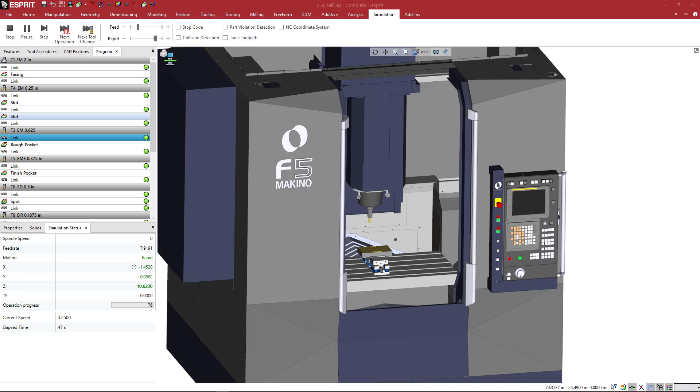As a machinist, you don't want to be milling into your expensive fixturing or accidentally rub your tool holder surfaces up against your work holding. So by spending a little time up front building your work holding products into the Esprit simulation, you will have a ton more confidence in your program sent to the floor.

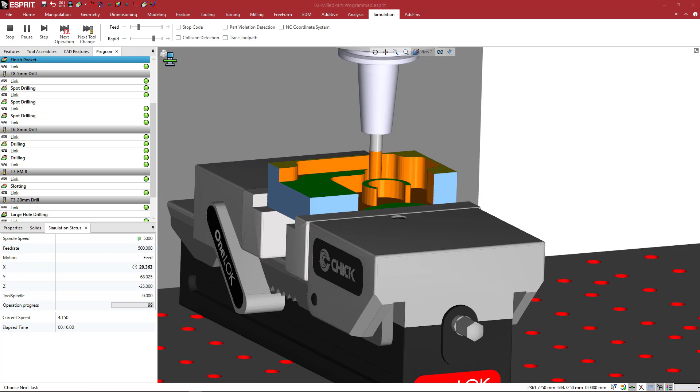So let's build this single jaw Chick vise. This is the CAD model for one of the Chick vises that you can download directly from their website. This particular model, if you wanted to follow along, is their OneLOK vise. It's the 1540 series, and there's two of them - a CM and an MCM. So this one is the MCM model.

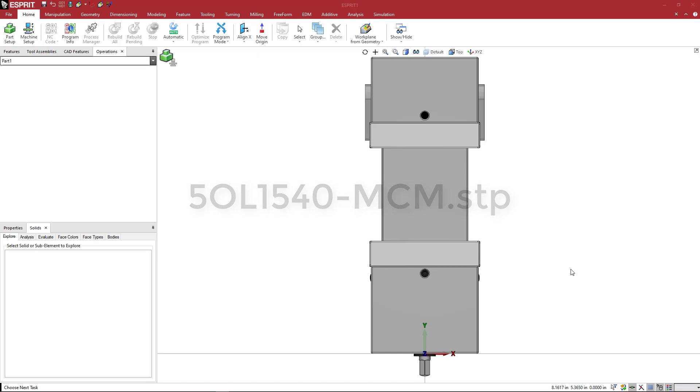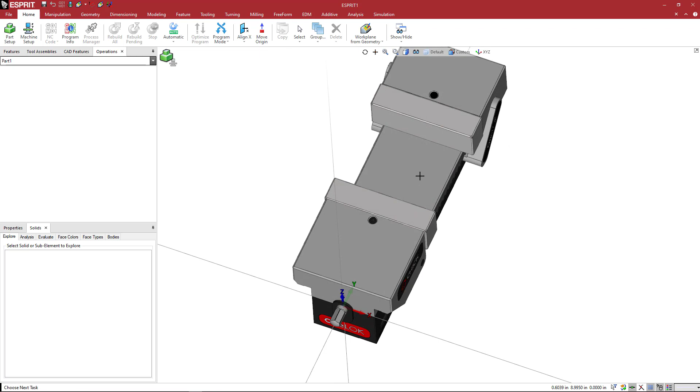I'm not really sure what the difference is between the two, but when we look at the model, the first thing that we want to do is make sure that the model is oriented and positioned correctly in space. So when we look at it, the movable, or the jaw axis, the vise axis, whatever you want to call that, is along Y.

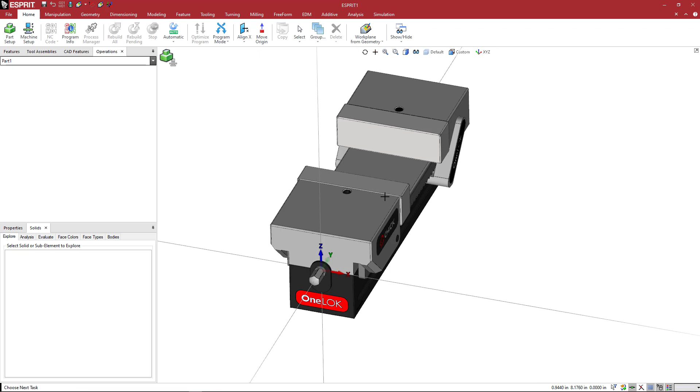And I think that that's what we want, because typically most people that I see would initially mount their vise in this orientation, with the Y-axis. Let's say you're standing in front of a Haas machine - your vise is going to go in and out of the machine, this axis. So I think that that's fine.

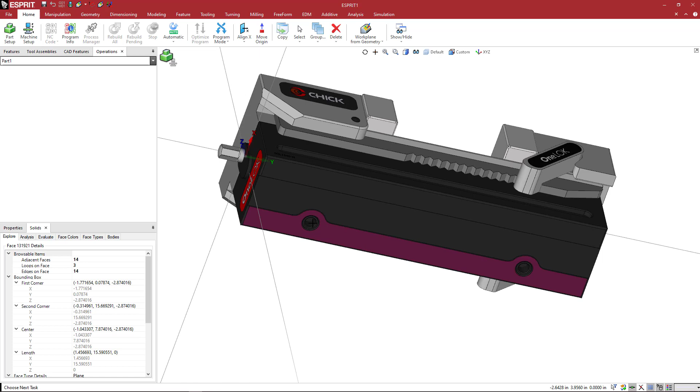If we look at the orientation, it is normal to Z, which is correct, but the location needs to be adjusted. On these particular products, I'll highlight this face here. What we're going to do is set the 0 point at one of these locations - a ground location.

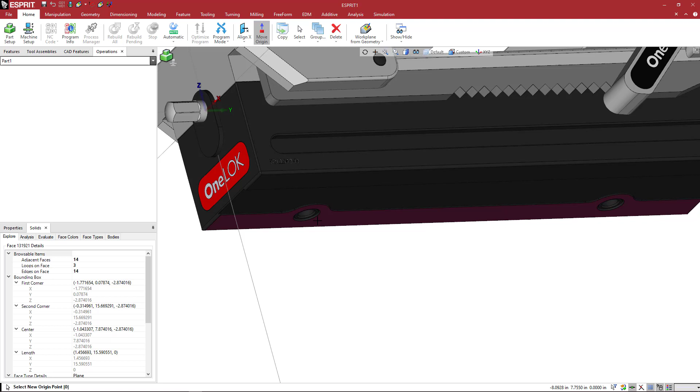So if you have a Chick foundation that has the press fit bushings for location finding and repeatability, we're just basically going to come here and say move origin point to this location. So under the Home tab, we're going to come to Move Origin, and we just want to make sure that you can see there's definitely different little circles that I can highlight and pick. I want to make sure that I'm on this one - it's highlighting in green that outside face.

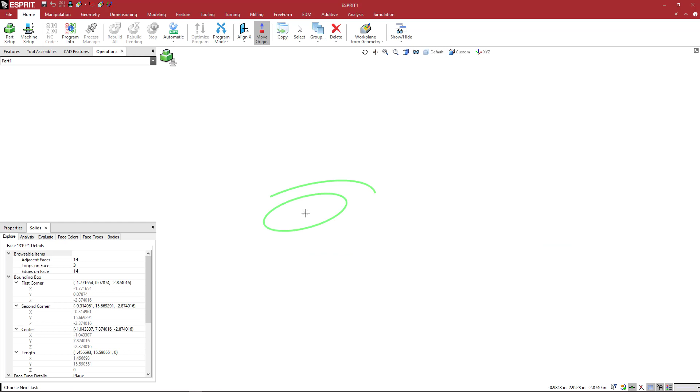I don't want to pick one of these inner bores or inner circular faces. I just want to pick this one on the outside, because that is the face that is going to sit flush. Let me go to a clear view here - these are the faces that are going to sit flush on the top of the table, or the CHICK foundation that you can interface this product with.

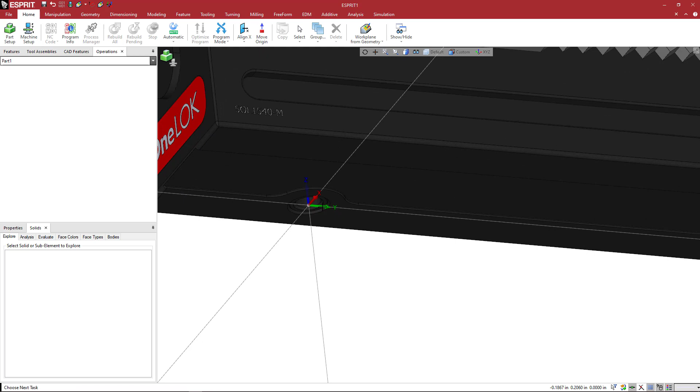So I'm going to go ahead and use that. Now, if you don't have a foundation, you don't plan to use a foundation, you got some custom thing, you can use a different location - you could set this to whatever you want. So basically, when we load this fixture into the Esprit simulation, this is going to be the reference location point.

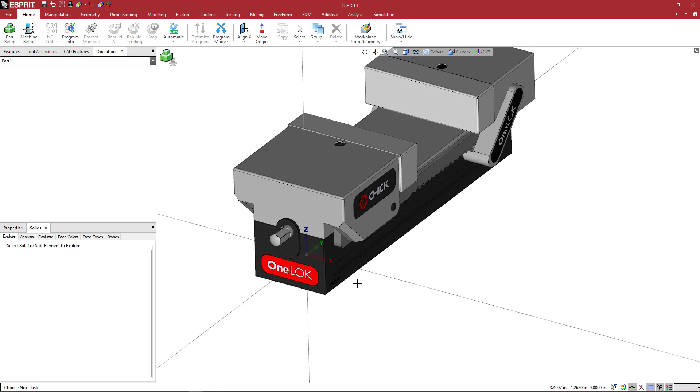That Esprit is going to use. So if you loaded it right on your machine table without the foundation, what would happen is this point would be at basically the center of the machine table itself. So, okay, the orientation, the location, the rotation along Y here looks good.

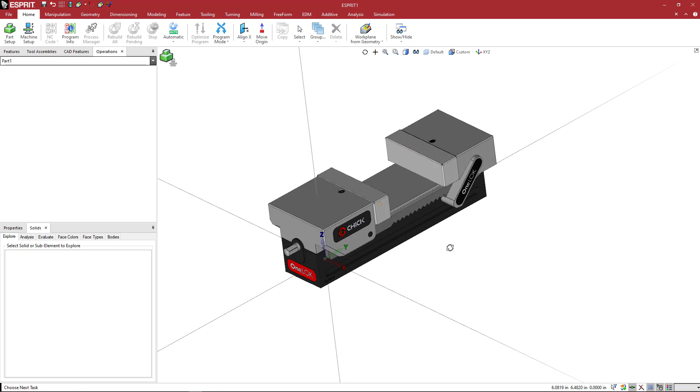So we're going to go ahead and start setting some of our 0 positions. So when you're making a vise like this in the Esprit interface, there's another product called Machine Tool Builder that gives you more flexibility. But inside the Esprit interface for basic fixturing like this with a single jaw, you really want to start with the jaw in the open position.

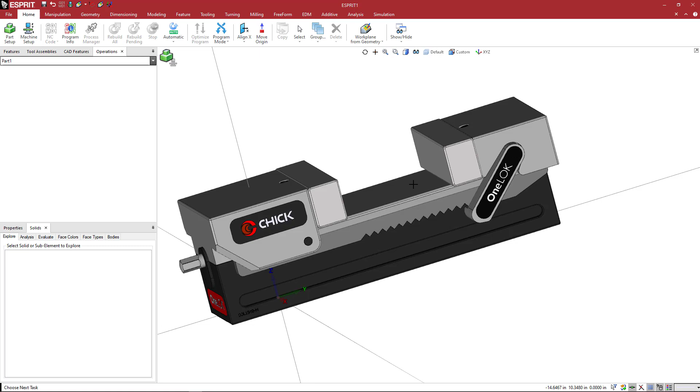Because when you save everything out, Esprit thinks everything is in the open position, and it's going to move to close it. So we want this in the open, or the maximum position. On this product, it's like 128 millimeters.

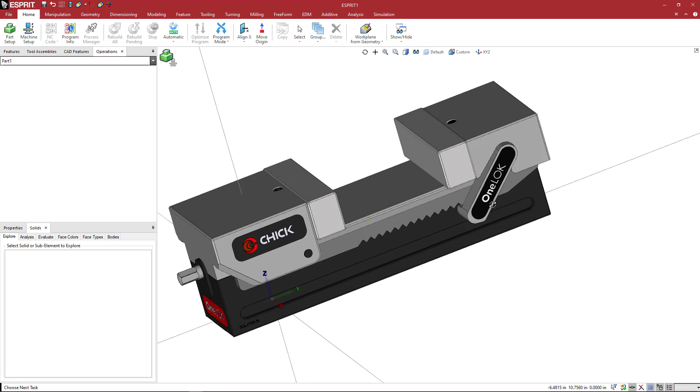You can see these serrations where the OneLOK lever is located. And to me, this looks like it's at the maximum open position, so I'm going to assume that's what it is. So we're going to go ahead and leave everything alone.

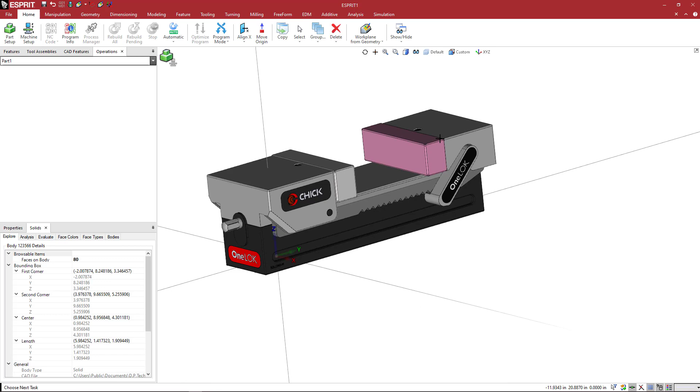If you wanted to kind of give yourself a little bit of leeway, what we can do is - let's see here - this is a separate solid. This here is a separate solid. Let me put this on a separate layer here. We're going to call this movable.

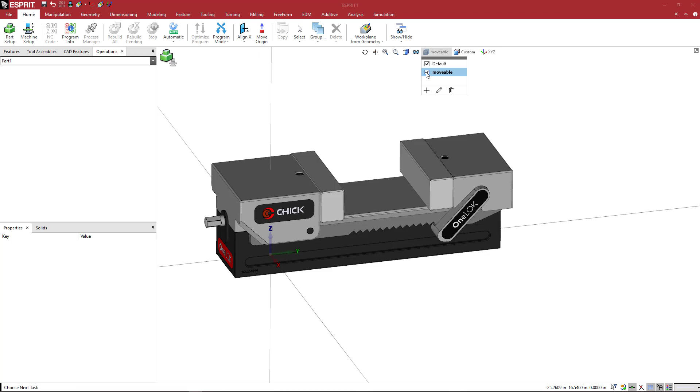And I'm going to come over here to the properties, come to general, and here's where you can change your layer. I'm going to say from default, let's put that on moveable. And if I turn this layer off temporarily, I can see that it's basically everything that would go along for the ride. So if you want to move these two solids just a little bit more, just so you know,

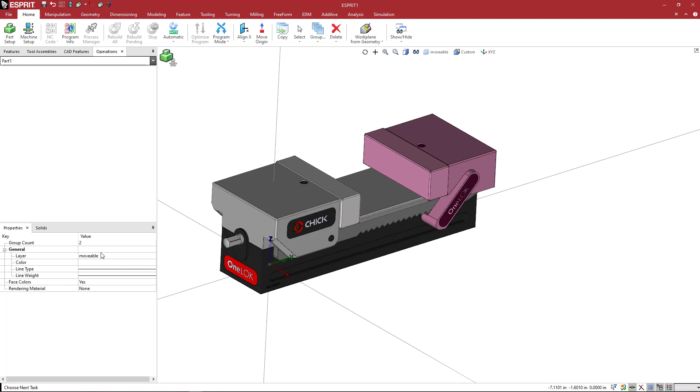in the simulation, if you got a big part in there, you're doing something, because it's simulation. As long as this is able to clamp, you can go ahead here and say copy, and then you can do a translate command, and you can say move, and we're going along the y-axis here, so we want to go in a positive direction. So I'm just going to say, hey, let me give myself an extra quarter or a half an inch or something. So I'm just going to say 0.5.

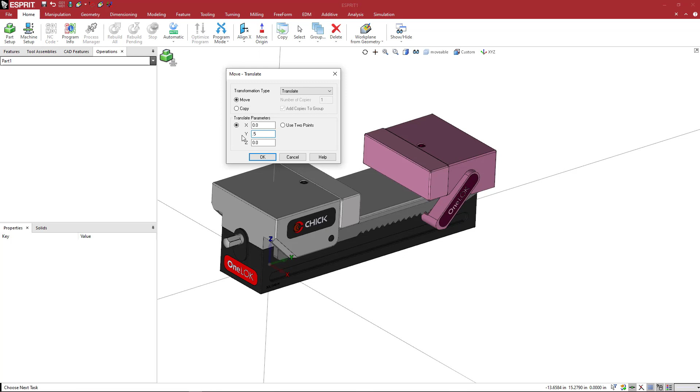And do you need to do this? No, it's not that big of a deal. But we can see here now that we are beyond the serration. So it's just a little bit of a fudge factor for myself. You don't need to do this. So we've moved this to a different layer.

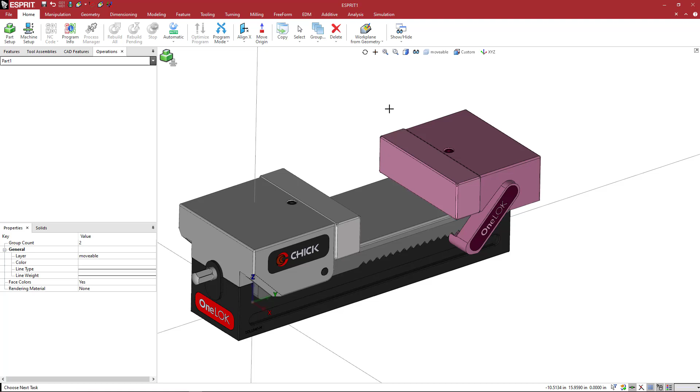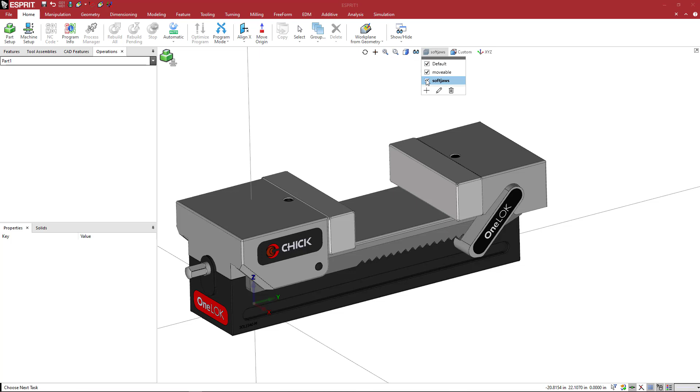Now what I want to do is I'm going to take each of these, basically these soft jaws, and I'm going to put them on their own layer. So I'm going to come here to the layers and create another layer, and I'll call this soft jaws, and we'll put them on that layer temporarily as well. So what I'm going to do is turn those off, and I'm going to come back here and activate the default layer.

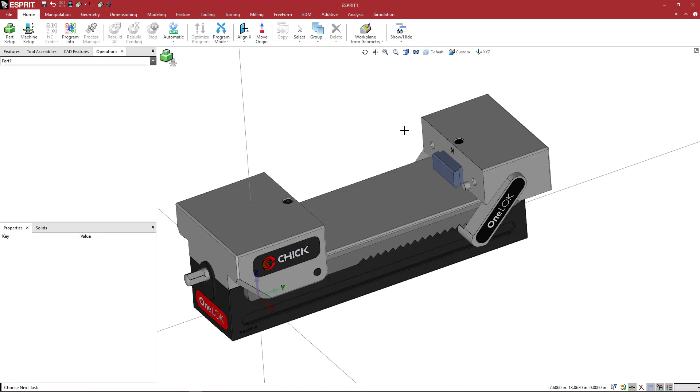So now I have basically like the fixturing cavity or zone of this vise without the jaws in there, because I might want to define different jaws for different applications. Maybe I have a round part or something with a different shape on it, and I might want to create that depending on how accurate I want my simulation to be.

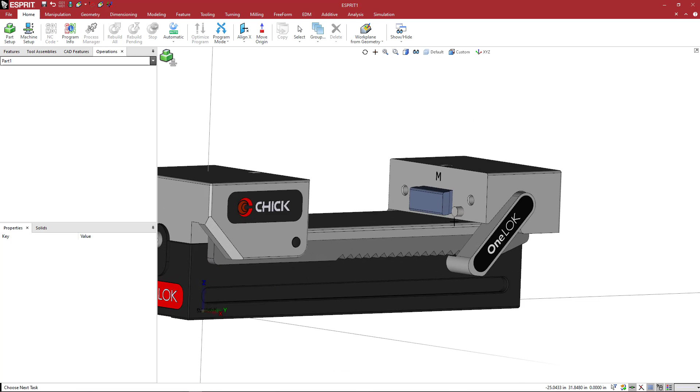So looking at this, we want to define our jaw axis. So this stuff here is going to move. It's going to slide up and down the y-axis, and we need to have a reference position for that. So what I'm going to do here is, I think I'm just going to come to this bottom position, and okay, so in Esprit, the default movable axis is always going to be along X.

So we see here that our UVW is right now moving it along Y. So anything that is going to be on the jaw axis, I want to make sure that it's moving along X. So we don't need to position our entire vise. We just need to position the jaw axis that we're defining. So what we're going to do here is, around the Z axis, we're going to rotate our UVW by 90 degrees. So here we're going to come and say rotate UVW, okay?

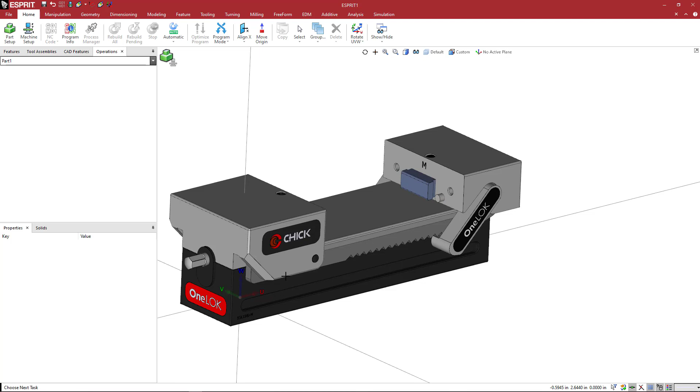And down here at the bottom left, it says what's the rotation about U, and then V, and then W. So we're going to put in 0, enter, 0, enter, and then positive 90. And that's going to get our U axis orientation, so that the jaw will move along U. And now I want to position that. So I'm going to position it where my jaw axis is going to be.

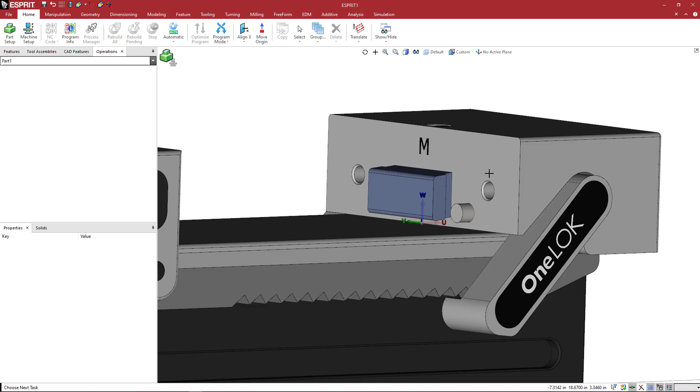So I'm going to come here and just say, let's translate. So activate translate, then click on the icon, and we're going to translate our UVW, and you'll see that there's a center point on this bottom edge of the solid, and if I click there, it's going to relocate my UVW at this position.

And here I'm going to come and say, let's make a jaw adapter _1. There's only one movable jaw. I don't need to worry about naming this or anything. So we're just going to go ahead and create that. So we have that now.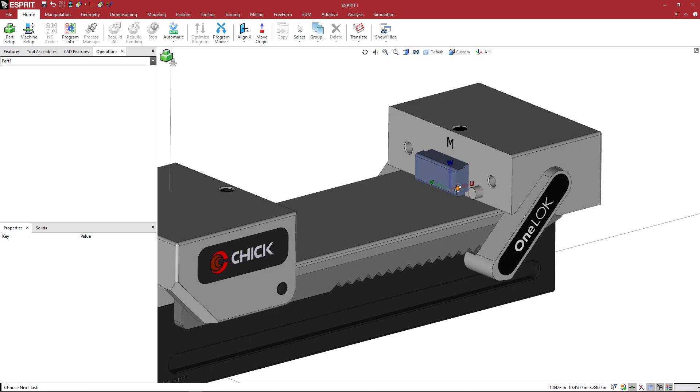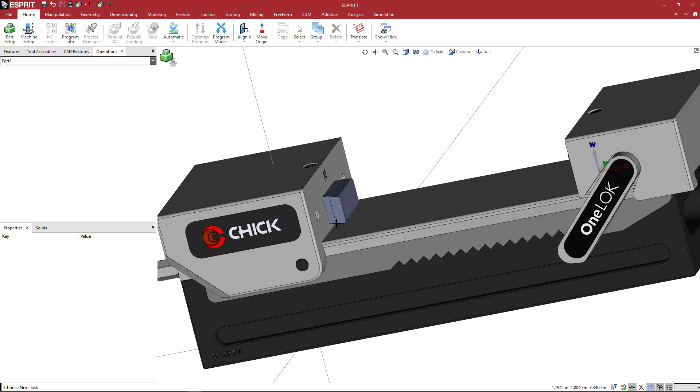Now what I want to do is put a location reference on this side. So I'm going to basically create a location where I can now mount a fixed jaw. So we can have a different jaw. And to explain this, on this movable, all of this with the jaw is going to be a single element. And this will make a little bit more sense later.

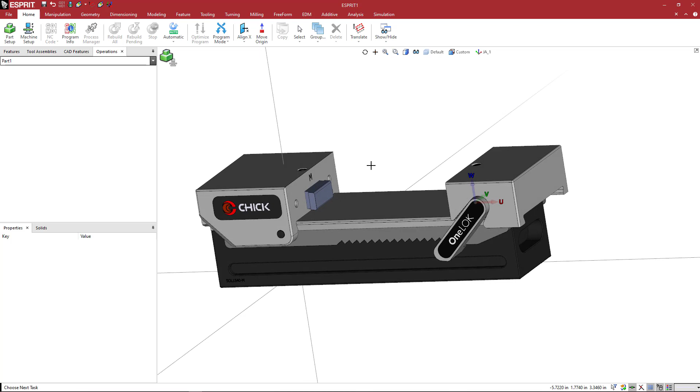But we're going to make one element that's going to include this whole moving assembly, which is going to be whatever soft jaw that I have here, or serrated or stepped or whatever jaw, with this lever component here. That's all going to be one. And then this body is going to be another one. And then this jaw here is going to be a third component. And they're all going to be assembled inside of the simulation.

So I need to make a location here for this jaw. And what I can do is I could leave this orientation alone the way that it is.

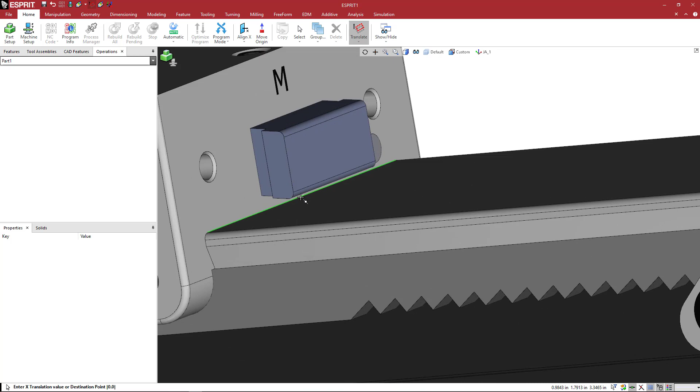I'll just come over here to translate and pick right here. And now I have this location for what we'll call a fixture adapter. So we had a jaw adapter for the moving portion, but this one is going to be a fixed jaw, and it's going to be a fixture adapter, FA_1, okay?

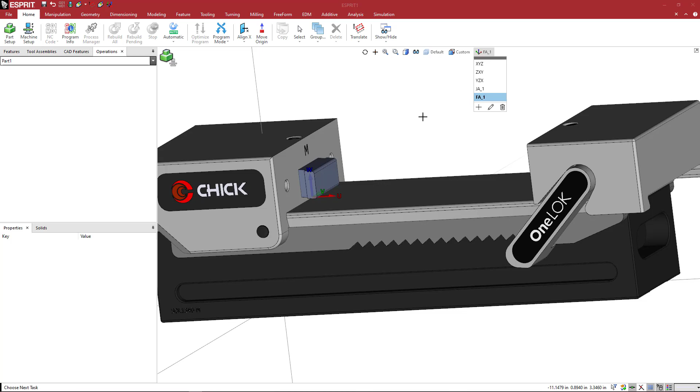So we have these two locations located and defined, and now what we want to do is, actually, let's show you this. Let's rename this. Let's right-click here and rename this plane. And at the end of this name, FA_1, we'll do an underscore fixed jaw. So now I see what it looks like.

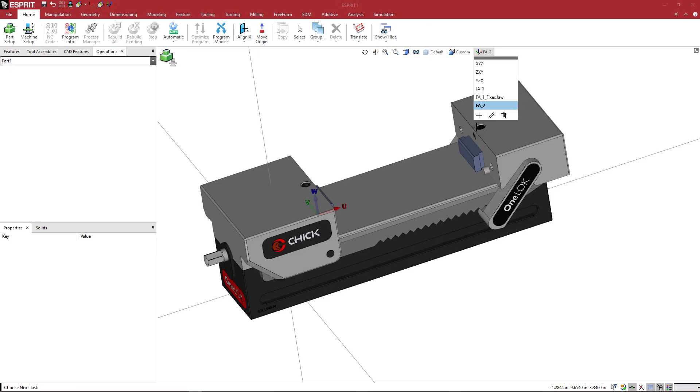And what I'm going to do is create another one, and we're just going to call this FA_2. So let's say we're loading another fixture into this fixture. So I have that here that I can locate that to. And if you're wondering why I just put it right there, it's because you can move that fixture around afterward. So you don't need to worry about where it's necessarily located.

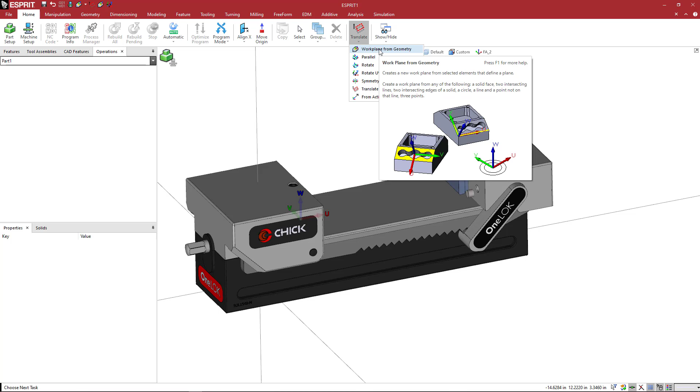So now what I want to do is create a place where my workpiece would appear on the screen when I want to mount it into the machine. So I'm going to come here to work plane from geometry. You have this little arrow at the bottom. Pick your work plane from geometry, activate the icon, and we're going to pick,

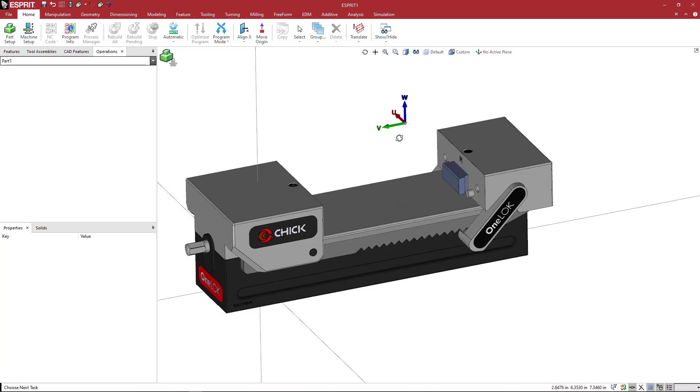we'll go from the base here, and we'll just shift this. So we'll come up and say translate this. I'm going to move this up 0, 0, and then let's say 4 inches. So it's up here above the fixture. And then I'm going to add a WA_1. WA means workpiece adapter _1. So we have a workpiece adapter.

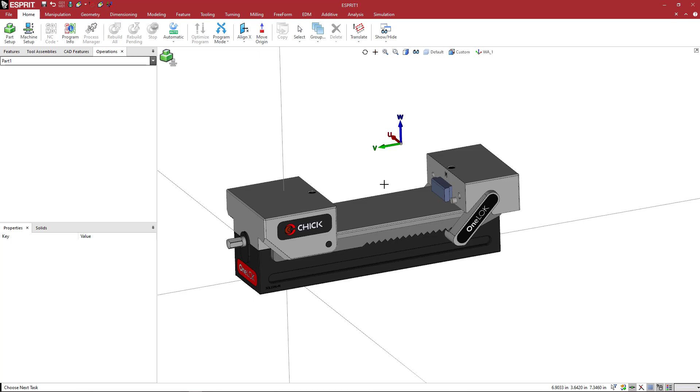So now what I want to do is save out my base unit. So I'm going to turn off the movable jaw. I'm just looking at my base unit here, and then I'm going to click and drag like this to grab this whole base unit here.

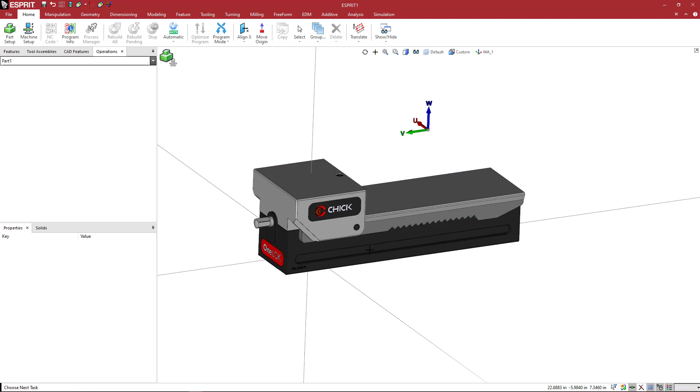And the nice thing about the Chick website and their engineers is they put all this coloring already in there, so we don't have to do any of that. If you've been watching any of the other tutorial videos, it's really nice that those guys made their product look just like it would in real life. So we don't need to do anything there.

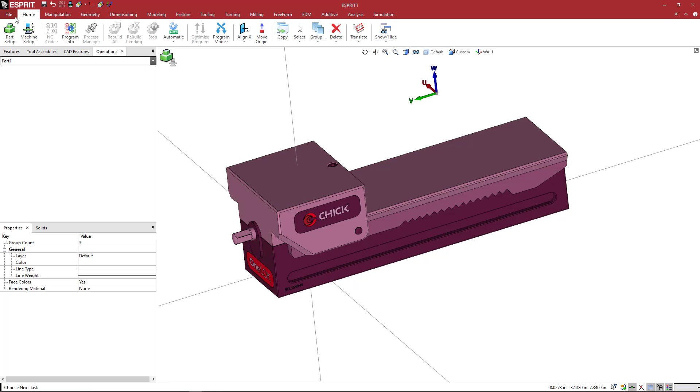I'm going to highlight everything. I'm going to come to File, Save As. And here we're going to save this as a fixture file, GDML, and then come to my fixtures Chick folder, and then OneLOK Vise. And here I'm just going to leave the name that the CAD model came in with. I'm going to say save.

And another thing I'm going to do is File, Save As, and save this as an Esprit file as well. The reason I'm doing that is I might mess up or want to change something. So instead of doing all these steps again, I'll save that Esprit file. Because once you save the GDML, if you don't save the Esprit, you'll have to start from scratch. So now I've saved this, and I've captured all of the work that I've done.

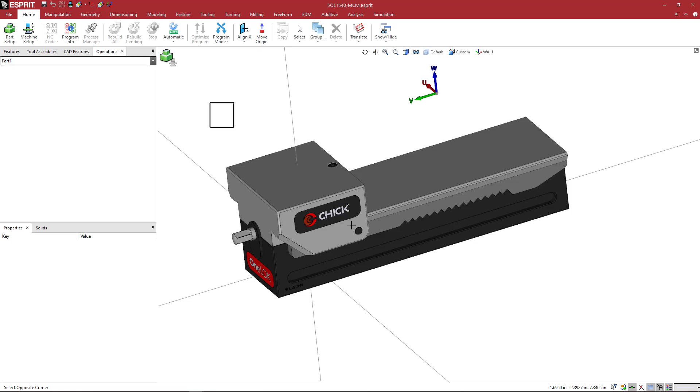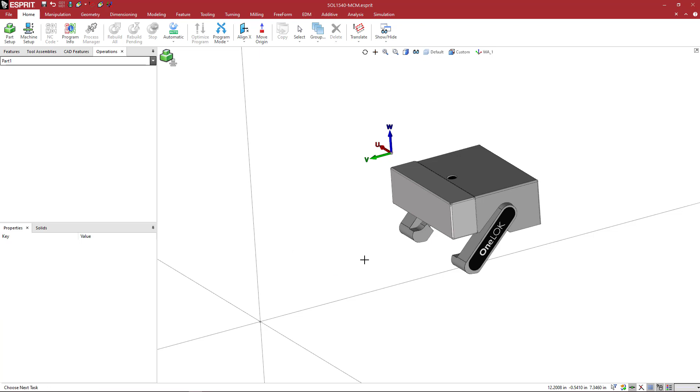I'm going to grab all this and hit the delete key, okay? And now I'm going to come back here and turn these on. Now I'm going to concern myself with the movable jaw assembly. So we've done our first component, which is the base unit. Now we're going to do the movable jaw components next. This one I don't need. I'm just going to click on it, delete it. Remember, we saved the file, so I don't need to worry about that. I'll just reload the file and keep that one and delete these on the next one.

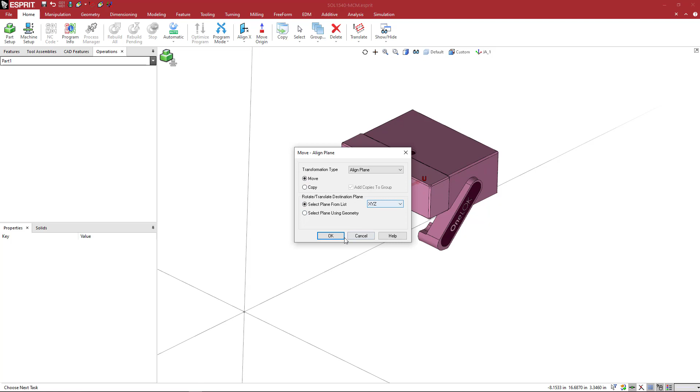So now what I want to do is come back to the jaw adapter. I'll double click on that in the list and it shows me where this is. So I have this assembly here, and what I want to do is highlight it all, right click, come to copy and say align plane, move, and we're just going to align it to XYZ. And when I do that, it snaps it into the position where the 0 point is at the jaw axis.

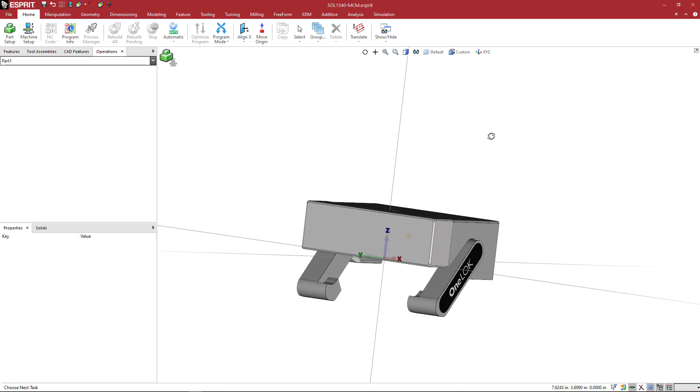So now here I can basically delete all these. I'm just going to delete this, delete this, delete this, delete that. I don't need any of those anymore. So basically I'm back to my standard work planes. I've got my movable jaw, and we can save this out.

So let's say eventually in the future I'm going to make some different soft jaws. I'm going to save this as my base jaw file. So I'm going to come here and say File, Save As, and this is going to be an Esprit file. And I'm just going to come here toward the end of the name and add underscore movable jaw.

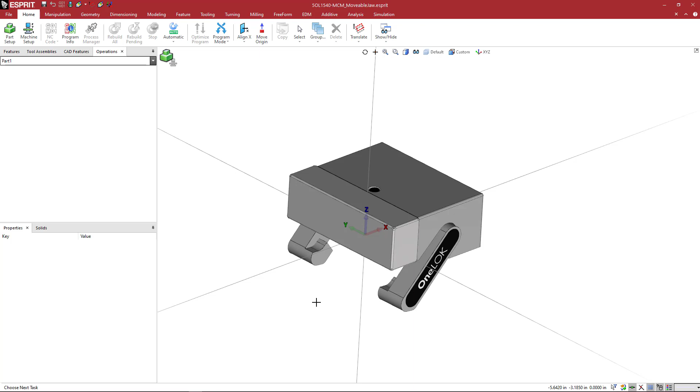So whenever I want to make a different movable jaw for this base unit, this 1540 MCM Chick Vise, I could just open this file and here I go, and now I can do something. So let's do something really quick while we're here. You could do whatever you want. I'm going to do this kind of quick. So if you want to follow along, you could pause and catch up.

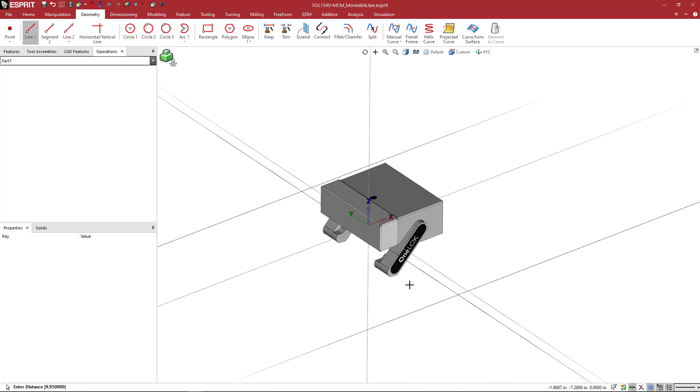I'm just going to say, let's offset this by 0.75, and then I'm going to offset my center axis by, it doesn't really matter as long as it's big enough to encompass the entire jaw. I'm going to come to keep. I'm going to keep these pieces of geometry, and then I'm going to shift and grab and translate this guy up, and we'll move this up 1.5.

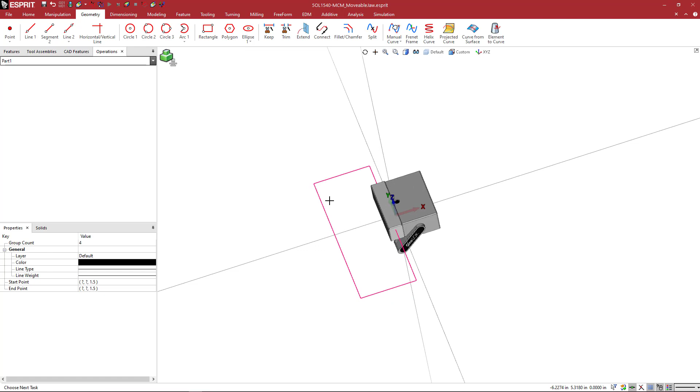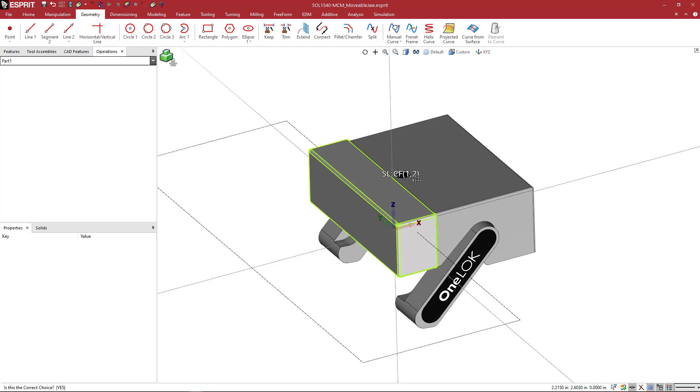I think the jaw itself is like 1.9 inches or something. So this gives me almost 1/2 inch of height, and the width of the jaw, I don't remember offhand. Anyway, I'm going to basically cut extrude this away. So I'm looking at this jaw. This is solid number 2. That's the one that I want to manipulate.

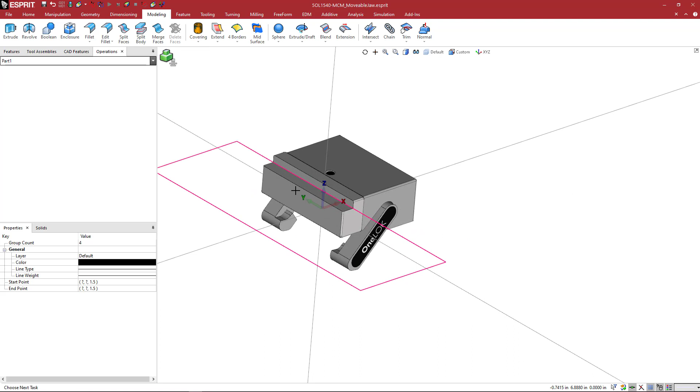So I'm going to come to modeling. I'm going to highlight my rectangle that I made, and I'm going to say extrude. And I'm going to activate body number 2, say let's cut that, and say okay. So basically I have a soft jaw that I've put a step in. So now I can set the bottom of my workpiece to this face, and the jaw will automatically be closed to this face. So now I just want to make sure nothing is highlighted.

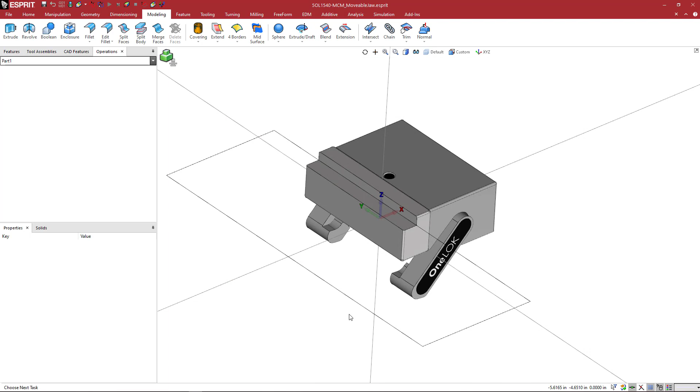So I'm grabbing everything and come to File, Save As, and I'm going to save a jaw file. Okay, so this is going to be the movable jaw, and I'm going to add underscore 1.5 by 0.75, and say okay. So we've saved that, and we've saved our original soft jaw file. So now I'm done with this one.

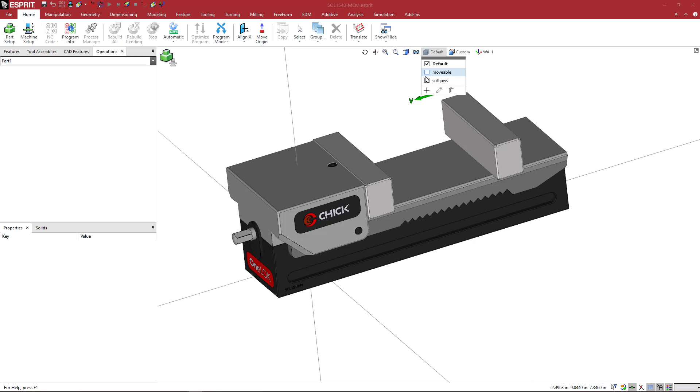And now I want to come back and open my base file that I saved out earlier, which has all of the components in it. So we're going to reload this file, and now I'm going to basically highlight this one. I guess the easiest way is to highlight the one that I want and hit Control W. That's a quick little hotkey to swap the group.

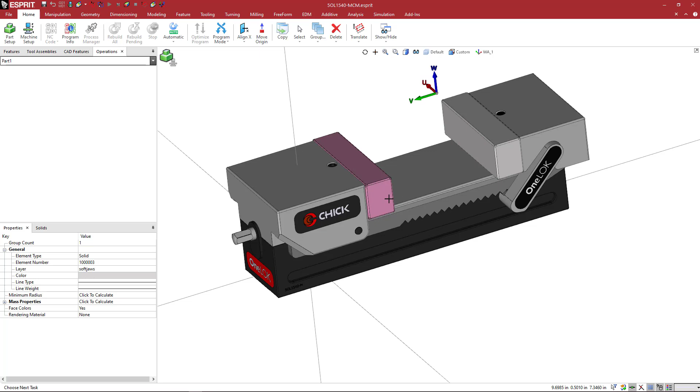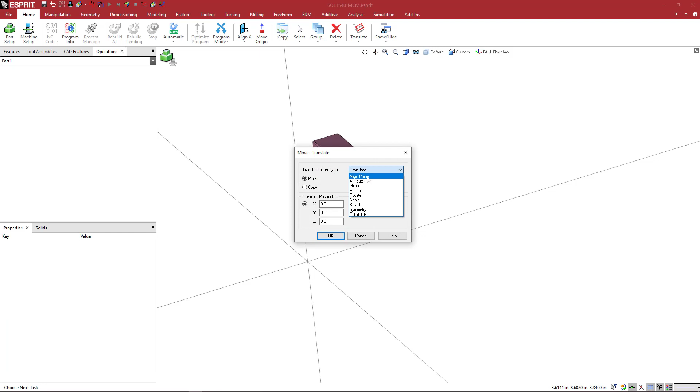So if you want to keep one thing and you've got 100 things on the screen, just pick that one item or 3 items, hit Control W, and then right click or hit the delete key, and you're done. So here we have a fixed jaw work plane. So again, what are we going to do? We're going to highlight this, right click, copy. We're going to go to Align Plane, Move, select Axis XYZ, boom, done.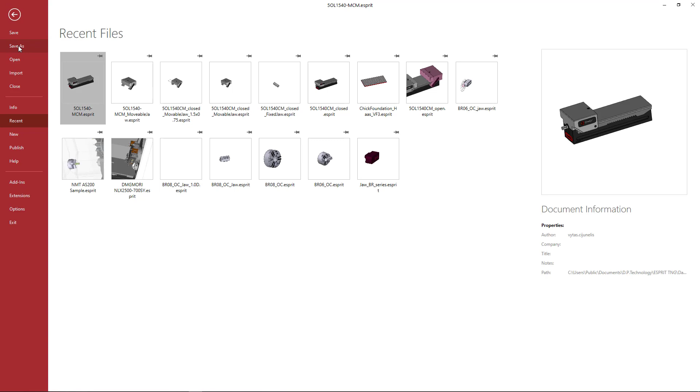Now these, I don't need anymore. So we delete those. And now I'm going to save out my fixed jaw. So I'm going to say File, Save As, and here at the end of the file name, I'm going to add underscore fixed jaw. So now I have my base file for any fixed jaw that I want to create.

So now I'm just going to duplicate what I did there. And again, if you want to follow along or do your own thing, whatever. I'm going to come over here to 0.75, doing the same thing, offset a couple of lines fairly large, offset this one, come over to keep.

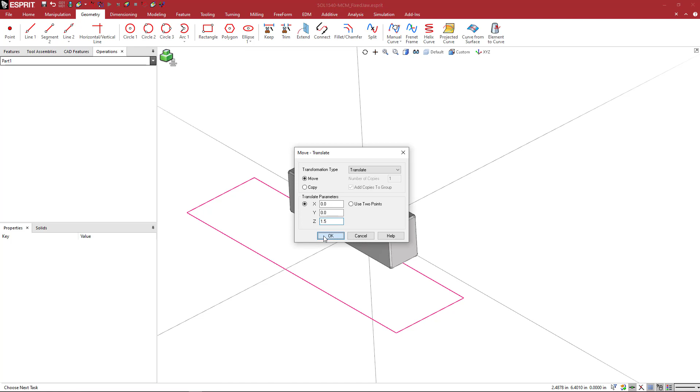We're going to grab these 4 elements, keep that, Shift, Control C, translate. We're going to move that up 1.5. And then we only have one solid. I already know which one it's going to be. I come to Modeling, Extrude. We're going to come over here to select that one. It's already set to cut. And boom, we're done. I'm going to click away so nothing is highlighted.

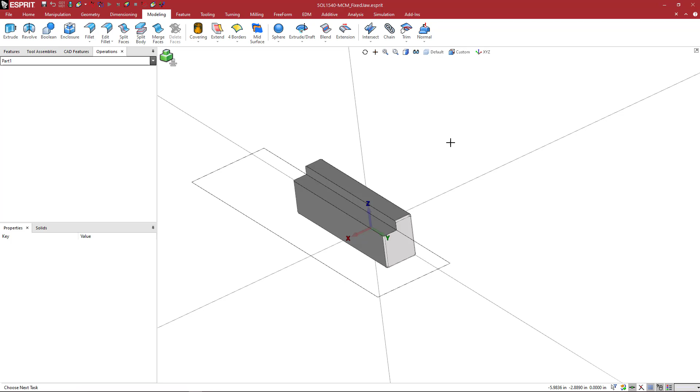And I'm going to say File, Save As. This one, we're not doing a jaw, we're doing a fixture file. Okay? So here I'm going to put that same underscore 1.5 by 0.75. Say OK. And now we can see how this is going to look in the machine. So we'll come here to the machine setup, and I'm going to come to Haas. So we'll load a Haas machine.

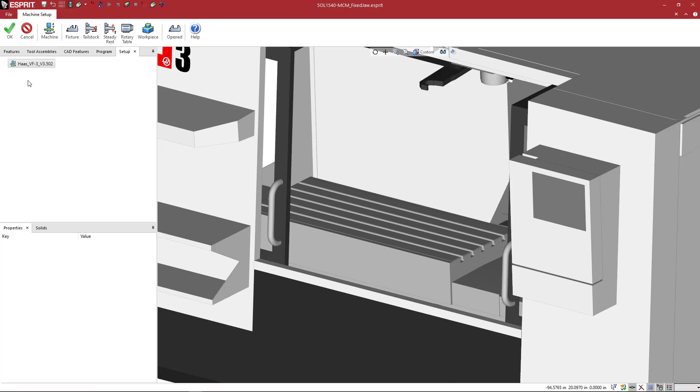And earlier, I created a foundation. So what I'm going to do first is create that foundation. So when you have your machine loaded, you're going to come here to Fixture, and I'm going to come to Chick Foundation. And I had to build this from their DXF print or their PDF print. So I just whipped this together really quick. And I'm going to say OK.

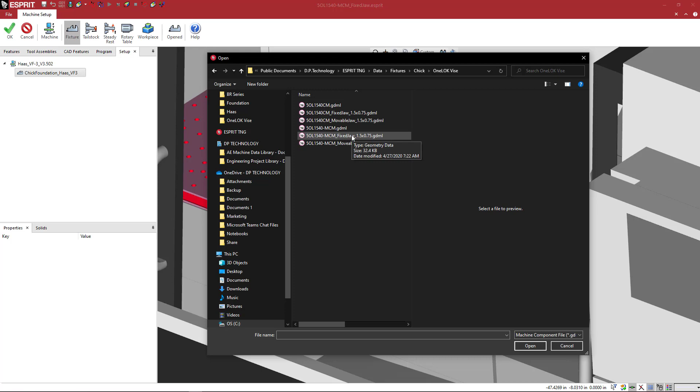And then on here, we're going to mount a fixture. So here I'm going to go to my OneLOK vise. The one that we just made was the MCM. So we're going to load this one. And you'll see that on the fixture, it comes over here to the left. So on my fixture, I created 3 FA locations.

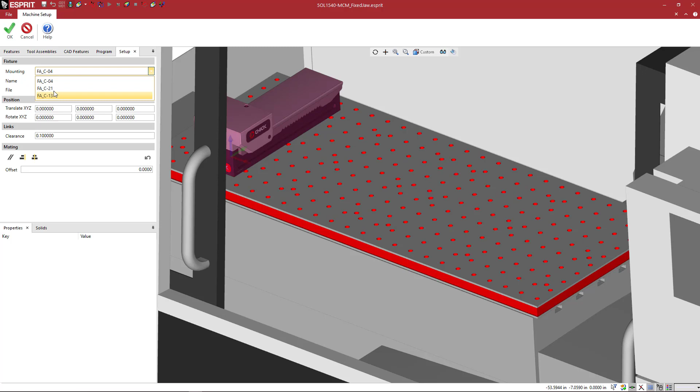So on these Chick foundations, they have an alphanumeric system where you have these rows that are A, B, C, D, and then each of these columns along Y of location pins or points, you have a numbering system. So it starts with this column first as 1, and as you move across, this middle one is 13. So I did 4, so you can see, I'll go to kind of a clear view here.

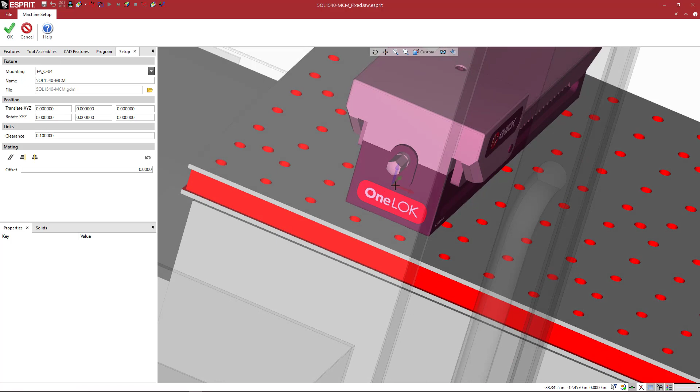You can see that on 4, 1, 2, 3, 4, where the O on the OneLOK is, I snapped that point in the very beginning where that location pin would be. It snaps right to, and we're set to C4. So A is this first row closest to the operator, second row, third row for C, A, B, C, and then 1, 2, 3, 4, boom, it's right there. So if I come here to C13, it puts that at basically that middle.

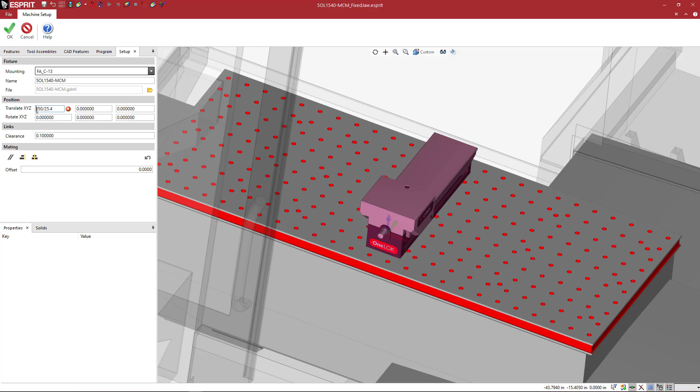And if I wanted to move this around, each of these holes is 50 millimeters apart. So if I want to move it to the left, I could put in minus 50 divided by 25.4 because I'm in an inch file. Sorry, I got to put in an equal here. So when you put in an equal, it will shift that over and do the math for you of 1.96. So anyway, we've got that in there. I'm going to say OK.

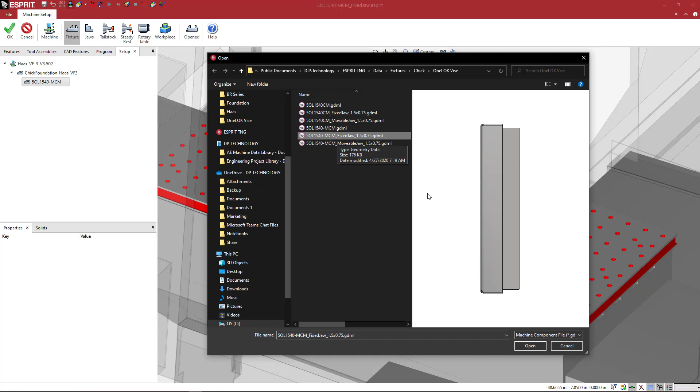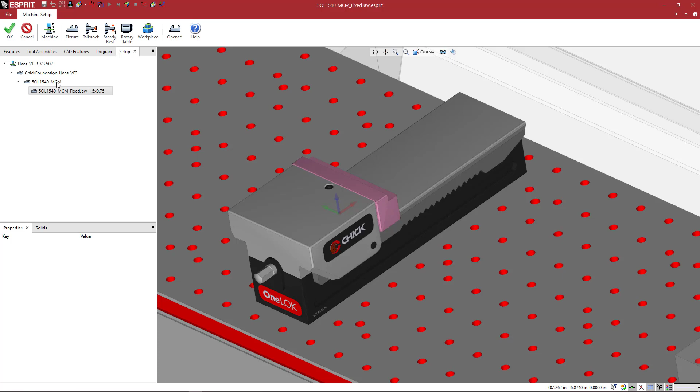And now let's go ahead and load a fixture. We're going to load a fixture, and we're going to bring in our fixed jaw. And this is our fixed jaw. I'm going to open that guy up, and you see that these are on the same location, but it's on the fixed jaw location, and there it is, boom, looking good. I'm going to say OK, and now there's no jaw icon here. Why is that? It's because I'm still highlighted on my fixed jaw. I want to go back to the base unit, and now you see we have an active jaw icon.

We're going to pick this icon here, and now I'm going to pick my movable jaw. So we want to make sure that we pick the MCM movable jaw, okay? And now you see that this is my jaw assembly. I'm going to bring that in, and there it is. So when we see this opened and closed, if we had a workpiece in there, it would stop.

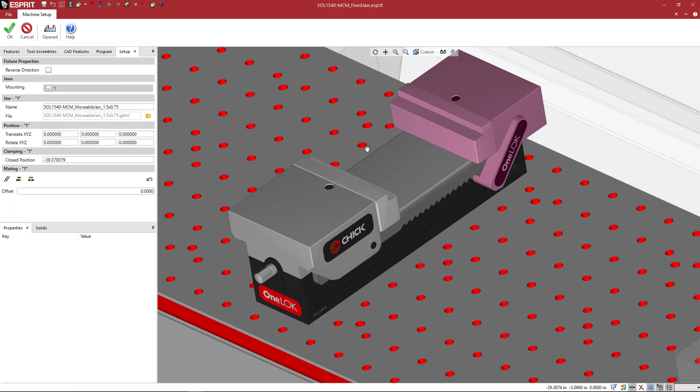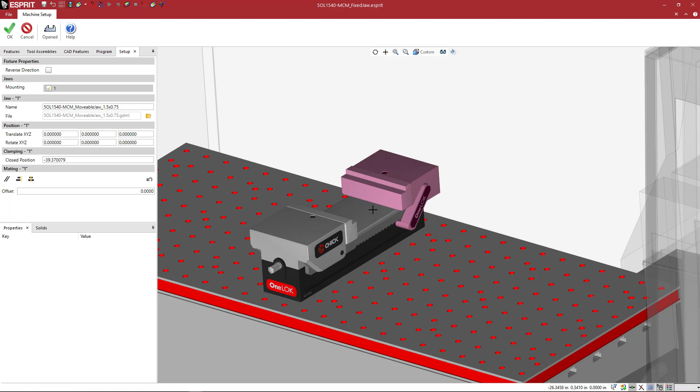But basically, we are ready to set up some awesome looking, very accurate Esprit simulations to make sure our program checking, collision checking, everything is there so that when this NC code is sent to the shop floor, we're very confident in our program, especially if you've watched some of the other milling holder tutorials and stuff like that. You're going to have some really nice, accurate simulations. So upstream of the machine, everything can be as accurate as possible. There's no surprises, and you're not editing code at the machine.